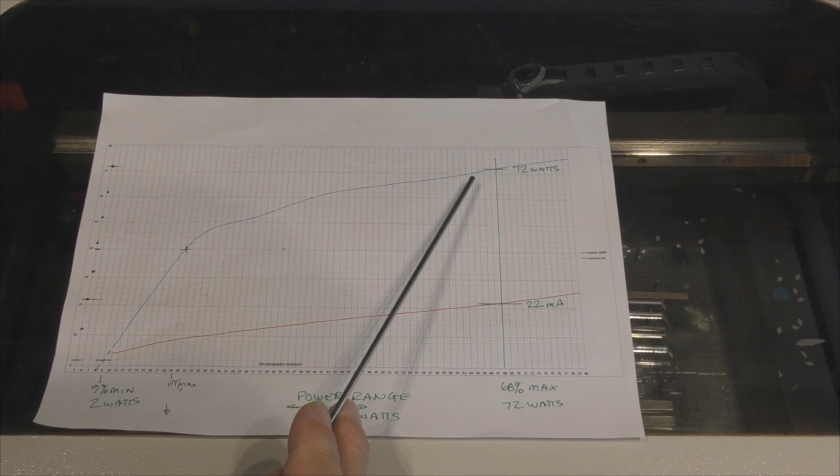Now, we found out last time that working over such a wide range caused quite a few problems when we're putting a lot of power in, specifically at the lower speed. So today I'm going to try some of the same tests again, but suppress the range over which I work.

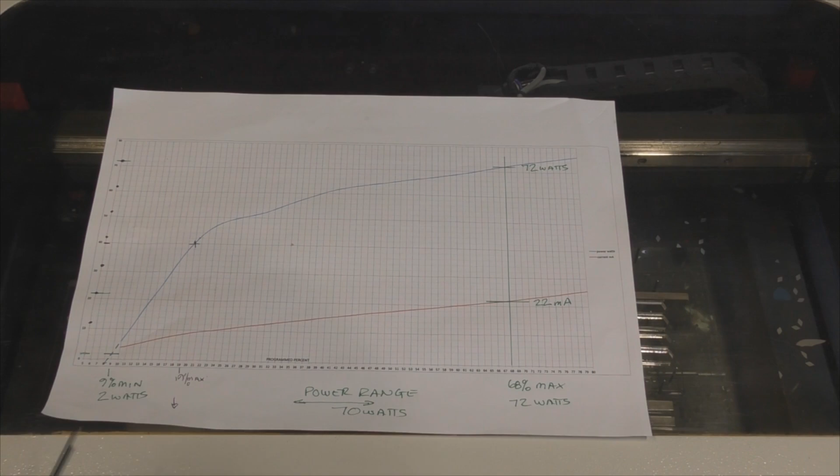Now that might sound like a good idea, except it means that when I'm calling for white, I'll still be punching a hole with 20, 22 watts. That doesn't make any sense at all. For white, I really need to be close to 0, which is right down at 9%, or 2 watts. Now, the problem with working down here is you get non-linearity because of a completely different phenomenon.

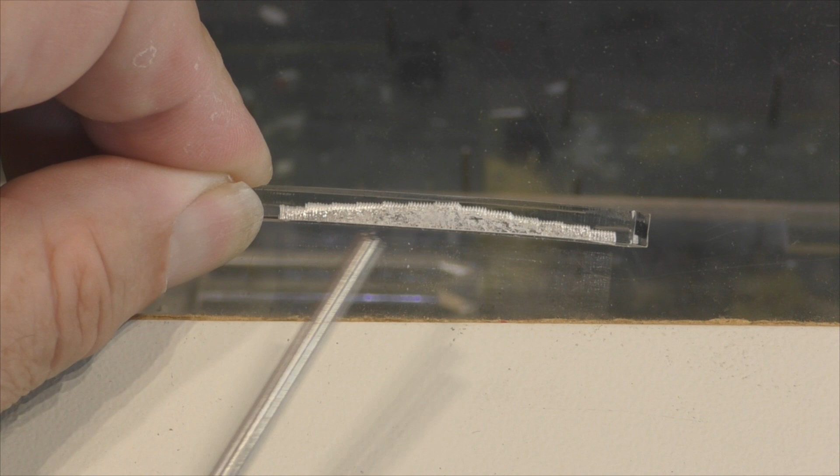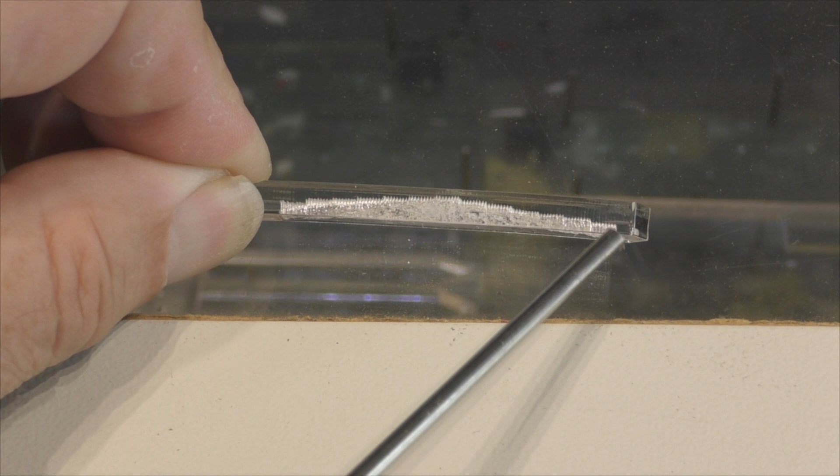That's because of this high frequency impact engraving zone, where although the average power claims to be, say, 10 watts for this step, because there are huge energy bursts, spikes of energy taking place, you're clearly getting substantially more than 10 watts worth of energy at these low steps. So that's more than 10, that's more than 20, and then we go on to 30, 40, 50, 60, 70, and then we drop down and at 20 we've got a big step down to 10 and a big step down to nothing. That's my problem - we're going to get some non-linearity at the lower powers purely because of this pre-ionization zone.

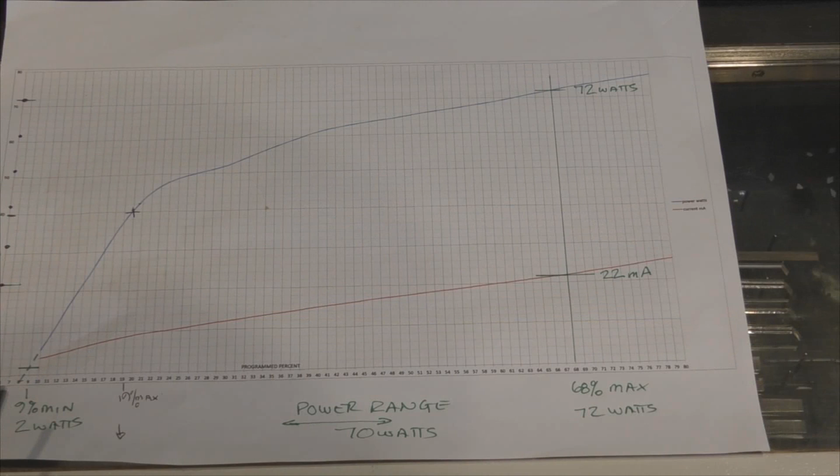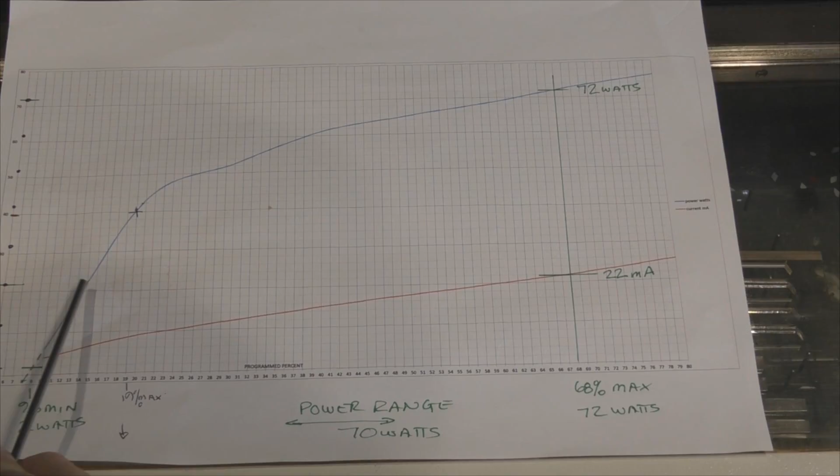I think we've decided we've got to stick with 9% because that's 2 watts. And how far do I go up the chart? Okay, so we've got our power set at 9 and 22 in the end. I'm going to set the speed at 50 to start with because that's the optimum speed - maybe we can go up to 100. We're not trying to bounce off the walls this time. All we're trying to do is establish some good parameters for this engraving.

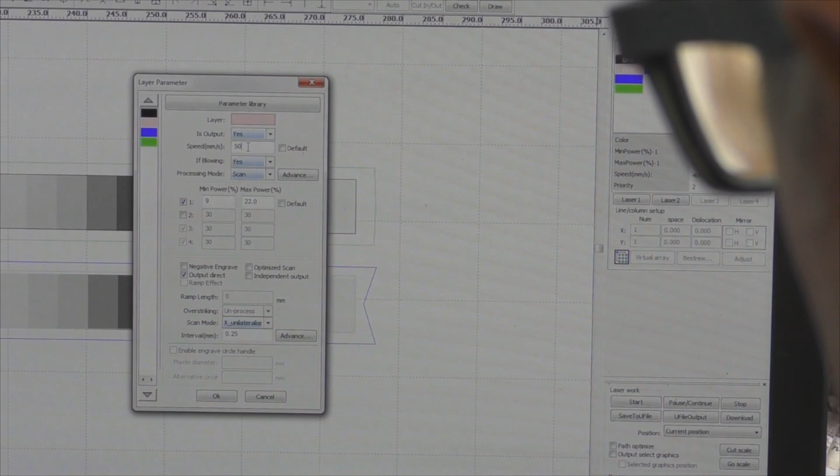I've still got my direct output and I'm still going to be using X unilateral, and the step interval at the moment I'm going to leave at 0.25, but I may change that later. We'll leave it at that for now, so we've got direct comparisons with what we did on the previous occasion.

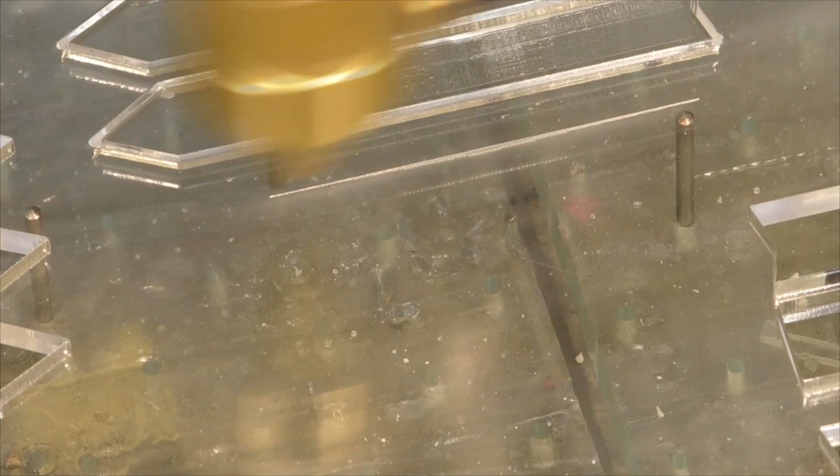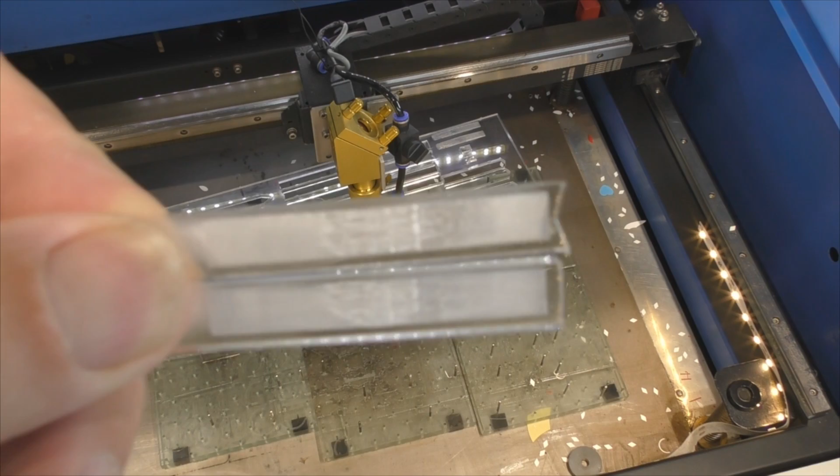Now, I don't think there's any doubt that you can hear that squeaky cut. I will just turn the fan off. Now that is a very noisy cut - that tells me we're working in this pre-ionization zone. We need to go and look at these under the microscope because we've got some nice cuts here and here, but just in the middle where maximum power is, it looks a little bit messy.

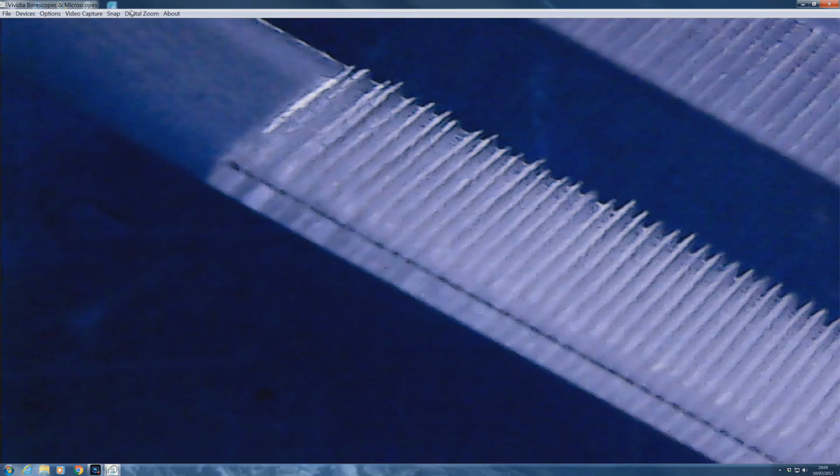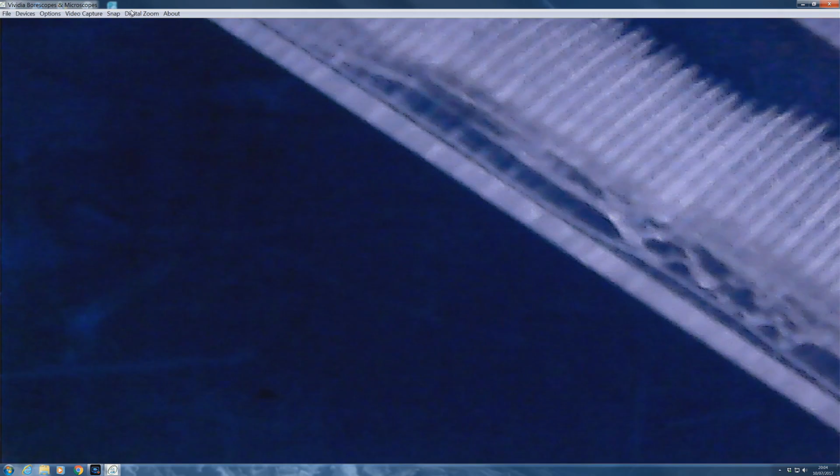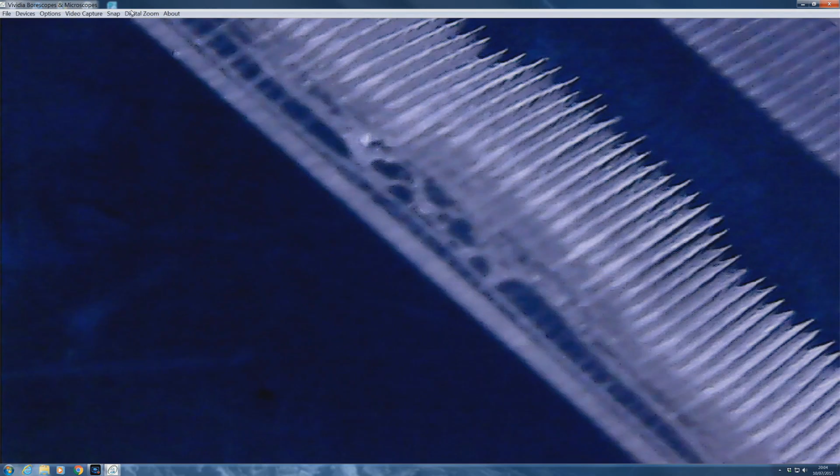Let's go and have a look, see what we've done. Well, this is 50 millimeters a second and 100 pixels per inch, and we've got a full set of pixels there by the look of it. Now, as we move towards the center, we can see some crazy paving appearing on the sidewall, indicating that we've actually put a little bit too much heat in there. Let's take a look at it from the other side, from the top side.

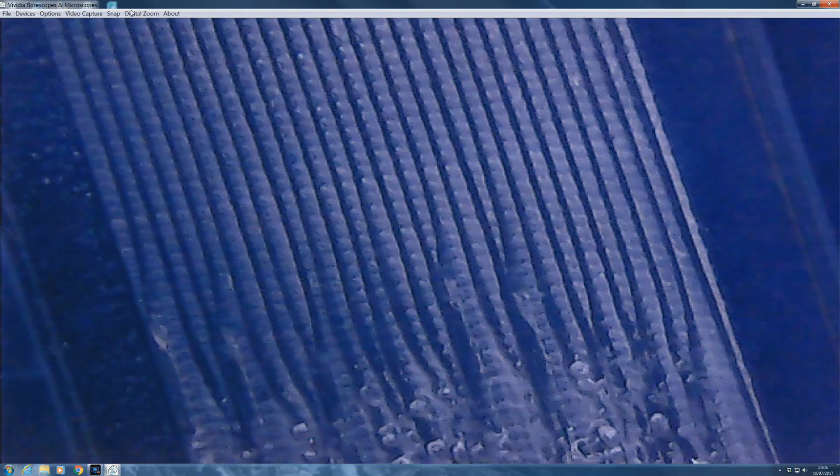There we've got a nice set of pixels, and as we run down towards the centre, nice parallel lines, and then all of a sudden when we get towards the centre, probably the last couple of steps, we're starting to break up, and we're getting a bit of a hideous mess here - that's purely because we've got too much heat into that particular area.

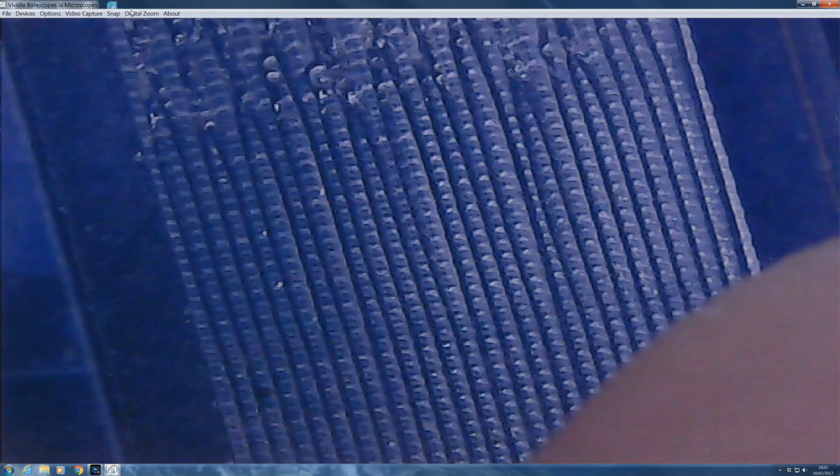And so consequently, here we go back out into the high frequency pre-ionization zone, and we're back to nice dots again. Now, I think the only thing we can do - we guessed wrong to start with at 22%. I think we're going to have to back this off to something like about 16%.

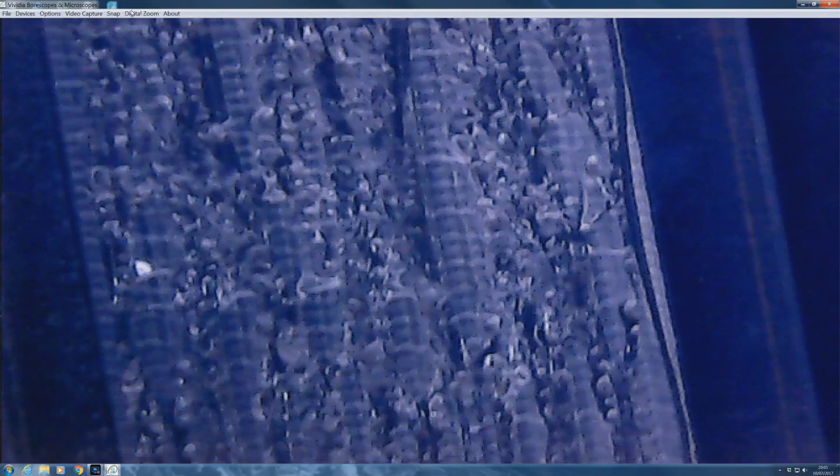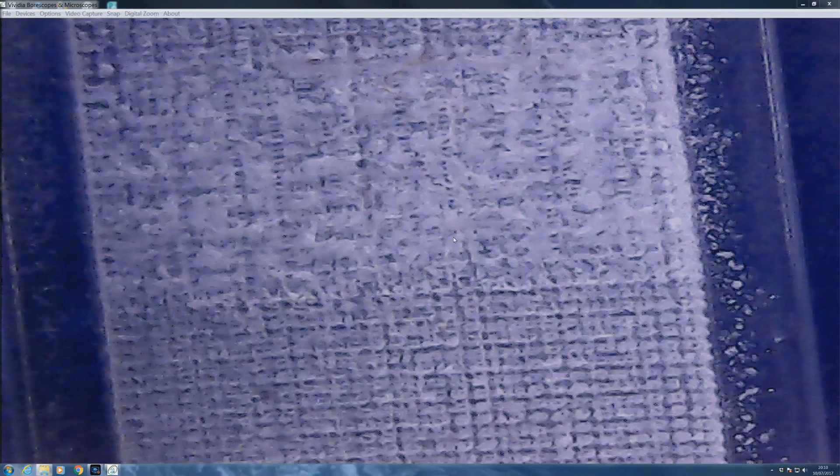There is still a hint of that strange marking in the centre, but I think what we're going to do at the moment is not go any lower. Here we are at 16%, and we've still got our little spiky gear teeth. Let's turn it over and have a look at what's happening towards the centre. There's just a teeny weeny bit of fuzziness right in the centre spot, but generally it's not bad, so I think we can live with 16%.

Now the focus is currently set to 4mm and it should be 5, so I've already set it just a little bit below the surface. But what I'll do is change that to something like 7mm. So that's 2mm out of normal focus, but right at the centre it's going to be closer to 3.5mm out of focus.

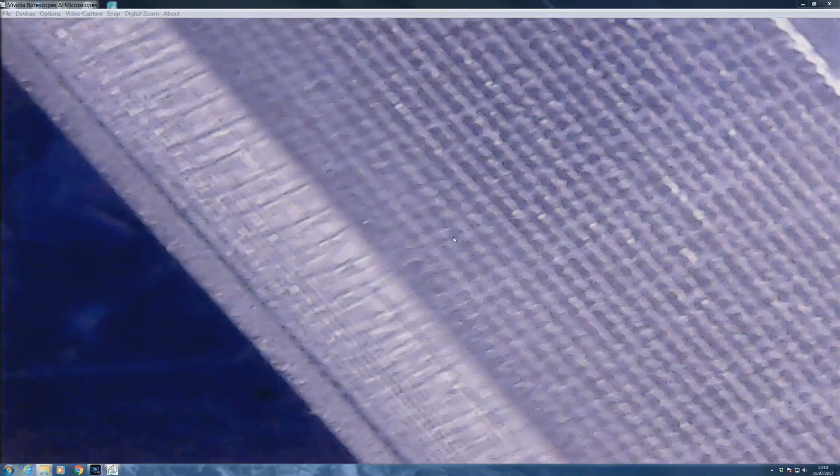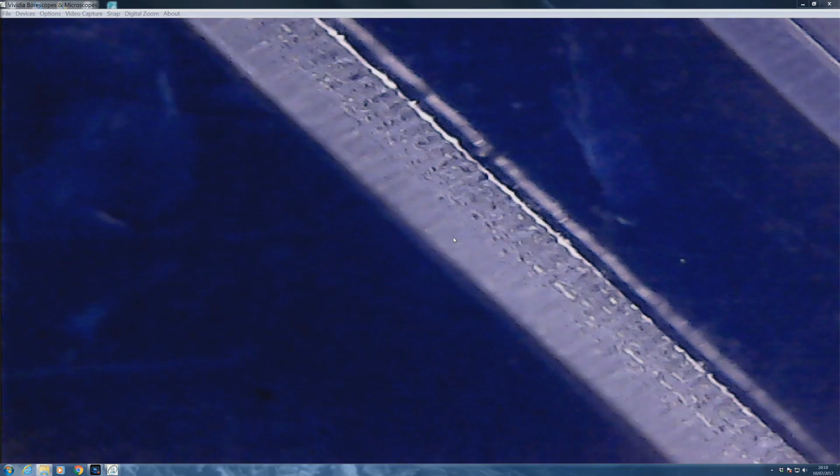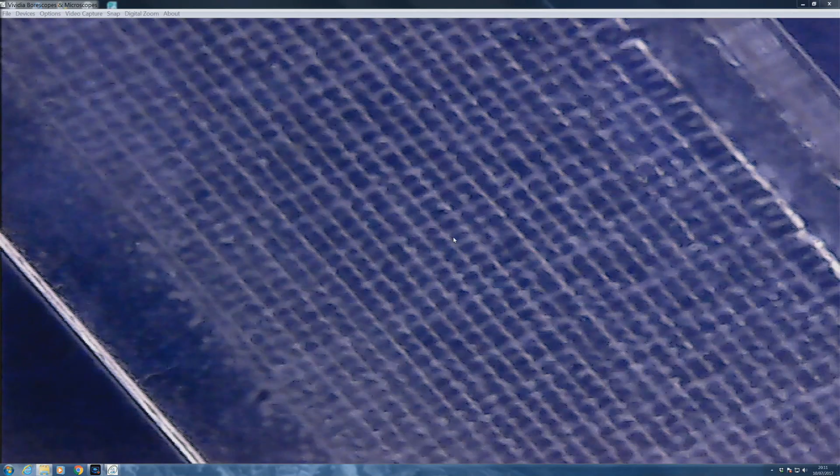Here's what 16% looks like when we defocus the beam. Let's have a look at it from the side. And look, there's absolutely no serious peaks there—little teeny weeny bobbles, but no peaks. So I only needed to drop the work by 2mm to get rid of those peaks. In other words, the out of focus has caused those peaks to disappear, and I've got a fairly uniform surface.

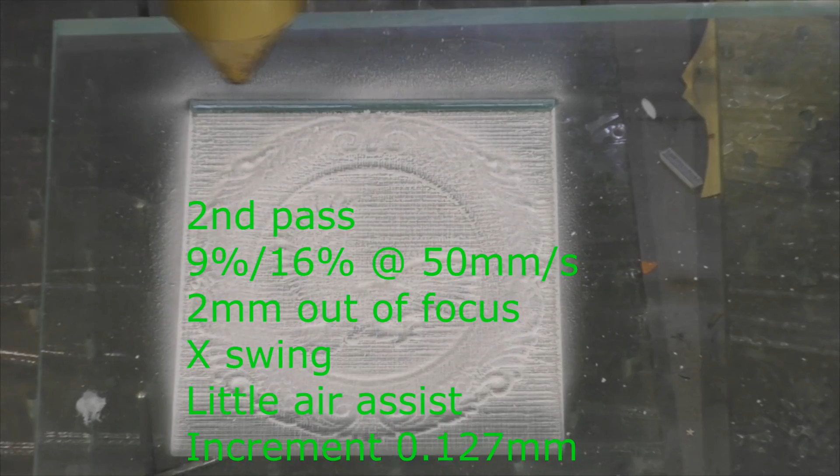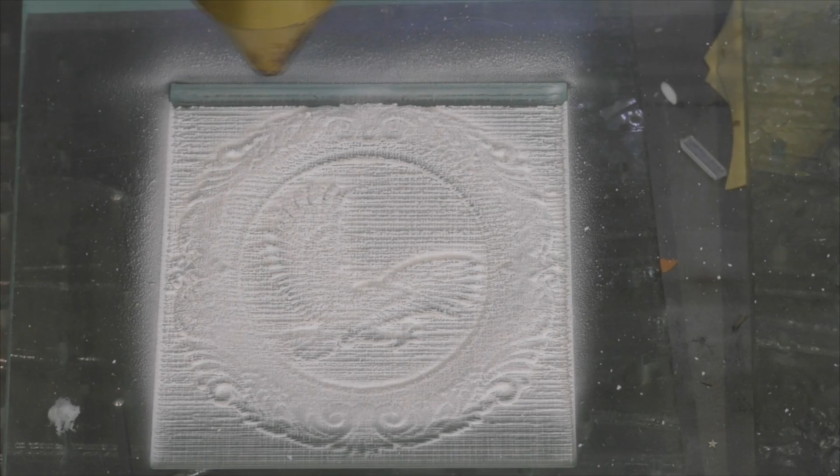Well, we've done one pass, and now we're just about to start the second pass. It's got a little bit of definition to it already from the first pass. Now I'm going to close the lid because I want the gas to lift up and flow across the job—I don't want it to settle on the job. Now that's not bad for just 2 passes.

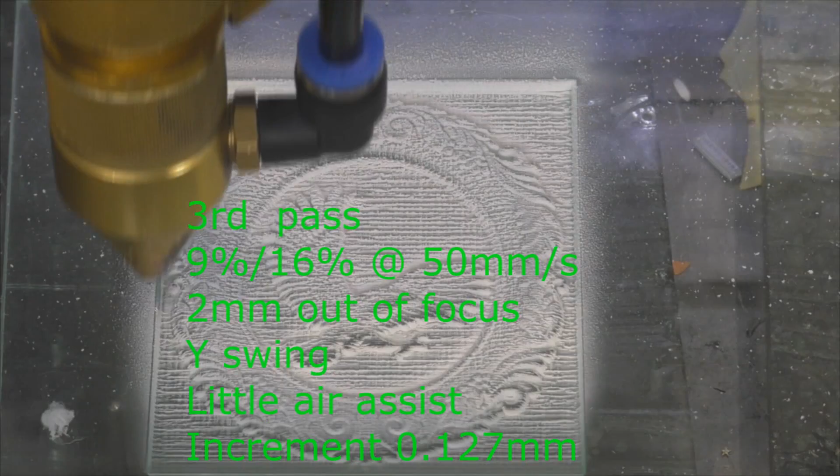But what I am going to do is try something completely different for the next pass. Well, it's 2 passes and about 3mm deep, so that's not doing too badly. I have to say that I'm pretty pleased at the amount of detail that's coming out. I didn't have anywhere near this success the last time I tried this.

So I'm doing this with roughly 30 watts coming out of the tube. By the time you take away, let's say 5% for each mirror—1, 2, 3—and the lens, that's 5, 4, so 20%. I'm losing, what, 6 watts? So we've only got 24 watts maximum, down to about 1 watt. So between 1 and 24 watts is carving that job.

Okay, now I'm going to change a couple of things. I'm going to change it back to X unilateral. I'll leave the power the same, and I'm going to put the speed up to 200. Hopefully that's going to produce like a polishing cut.

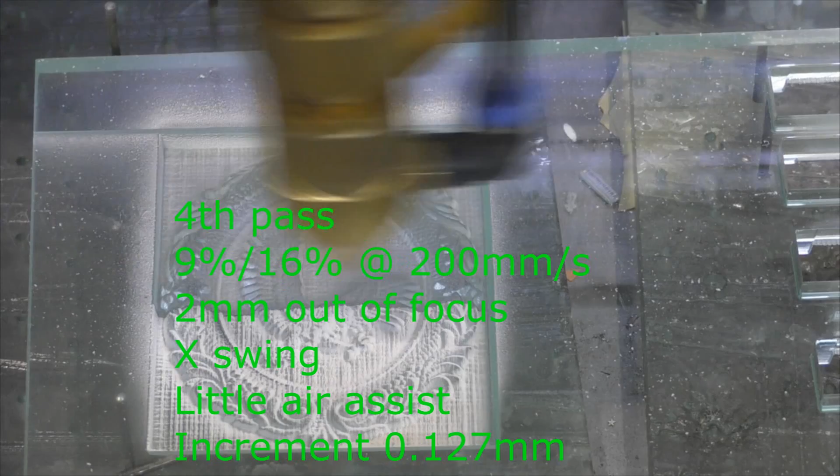Well, that seems to be doing a pretty good job of polishing that up. It's leaving it nice and clean. The background is still a bit dusty, but the actual image itself is coming out beautifully clean. It's amazing what a little bit of understanding can do, isn't it?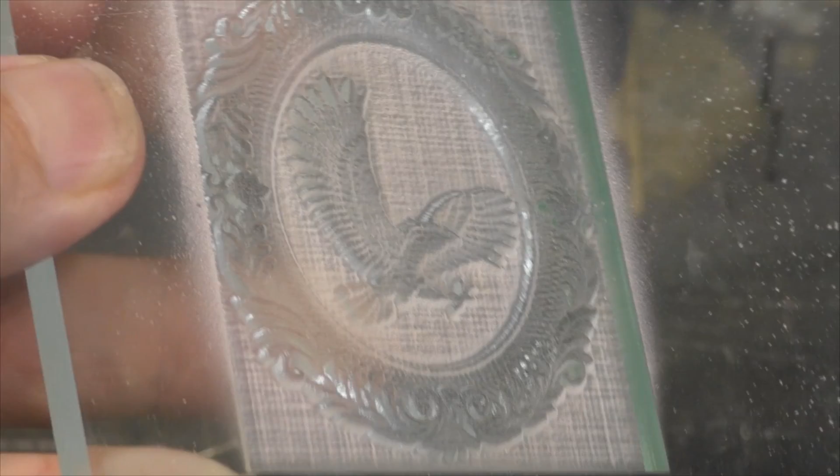Now we've got our tapestry background as we had before, but hey, we know what's causing it now, so we won't worry about it because we can fix it. But the rest of the detail there—it's pretty good, isn't it? In fact, as you can see there, that is literally only dust sitting in there.

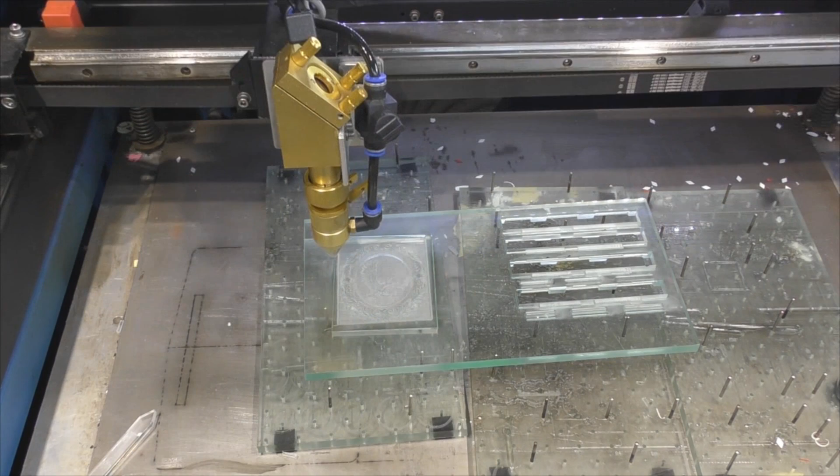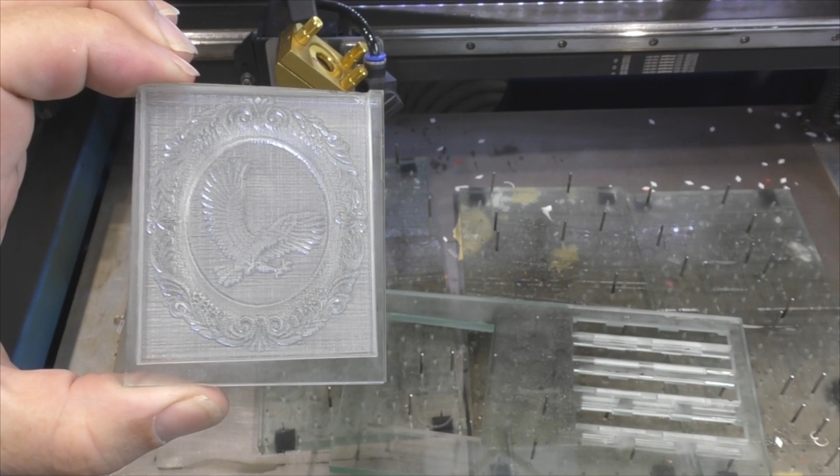Well, that's amazingly clean, isn't it? Catch a little glimpse of the light behind it, and it really does come out beautifully. Now I have to say, I'm quite proud of that.

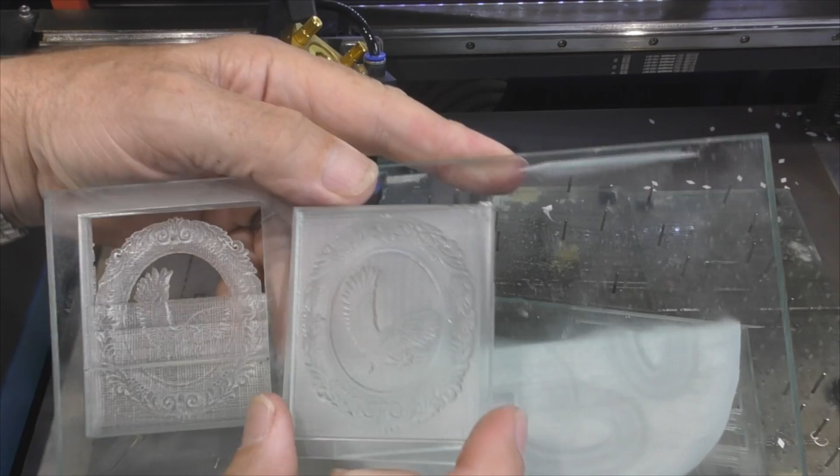Now I dug up my experiment from a year ago, and there is no comparison.

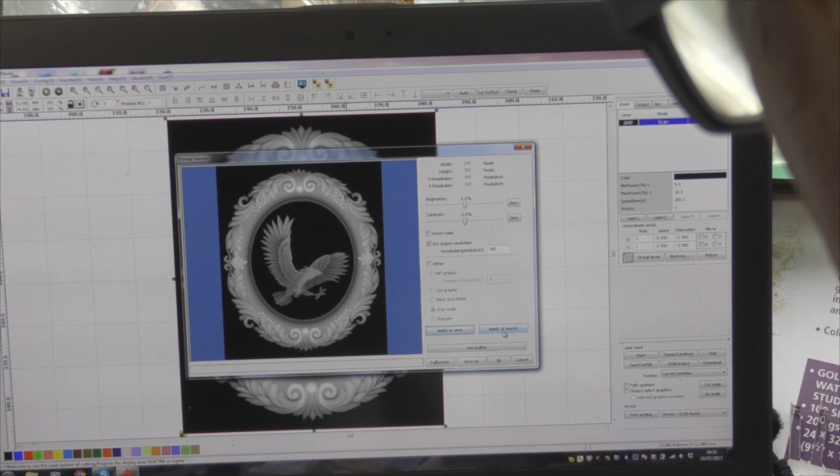Now this picture, if we put the bitmap handle around it, we find that it comes in at 343 pixels. Make those go 0. Set output resolution, we'll change that to 100. Apply and apply. Okay.

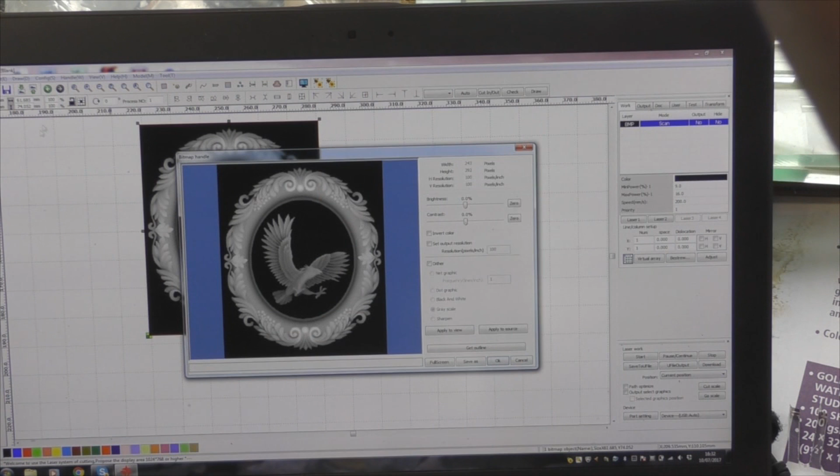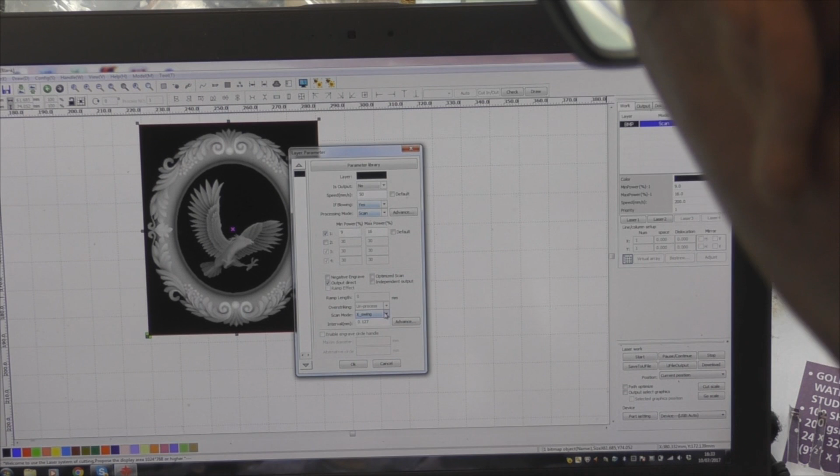So we'll just check again—bitmap handle. And sure enough, it's now 100 pixels per inch. Okay, and I'm going to start down at the bottom left-hand corner. We're going to use the same parameters, 9 and 16, 50 millimeters a second, and we're going to go for X swing and 0.127, i.e. twice as many scan lines as the resolution. So the scan lines are 200 scans per inch. Okay.

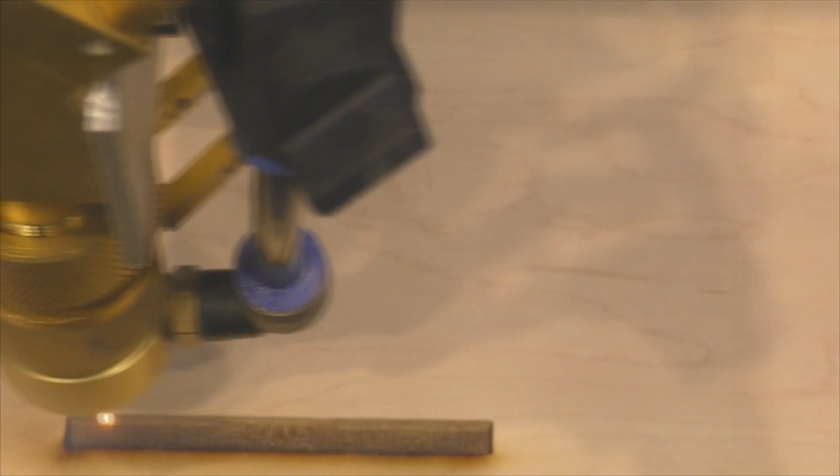Looks like the power is performing about the same as it did on acrylic. In other words, it looks as though we've taken about 2 millimeters deep. So again, it looks as though we should be doing 4 cuts.

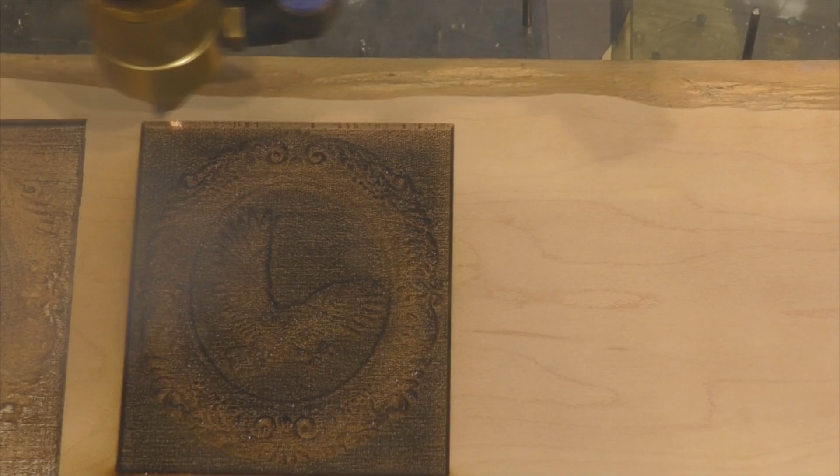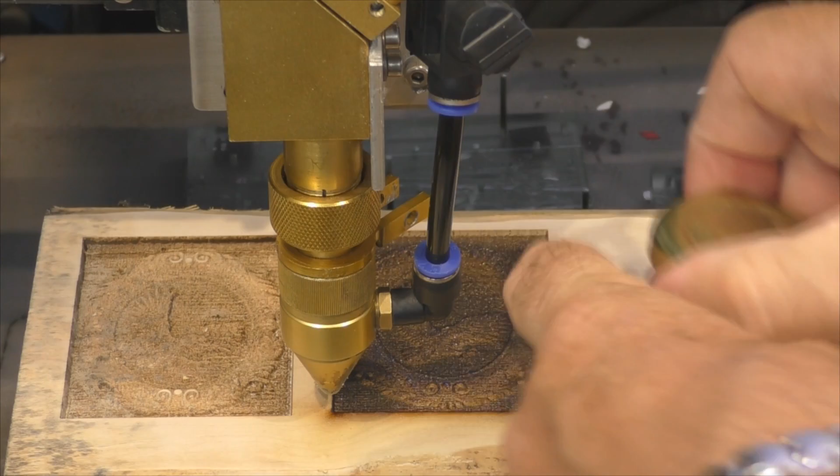2 horizontal cuts, a Y swing cut, and then maybe a 200 finishing cut. Now it looks like a nasty, shiny, tarry residue on the surface there, and I'm wondering whether I've still got too much air assist. So when this cut is finished, I'm going to adjust the air assist. Don't want to touch anything, so I've got my little container of water there.

As you can see, I've still got quite a lot of bubbles coming out of there. So let's just turn that down to reduce the bubbles. In fact, I've got it turned right off now and it's still bubbling nicely. So that's good, I can turn that off and know that I've still got some airflow coming out of the nozzle.

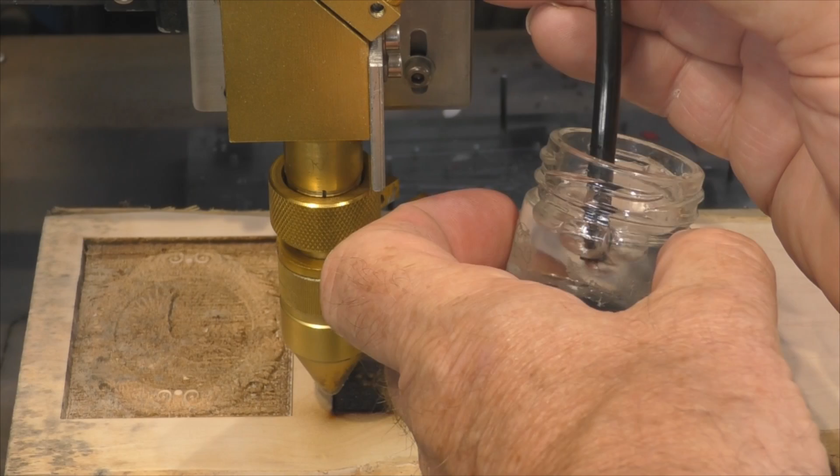No, we won't. We'll have some air. We'll have lots of air.

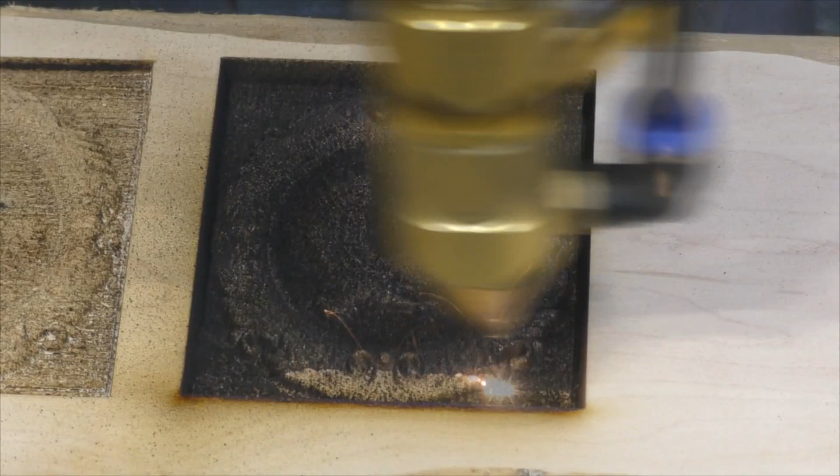Well, it's well formed, but also well black. So let's just see what happens when we go for a 200 clean-up cut, 200 millimeters a second. Wow, that's interesting, look at that. Not only does it work on acrylic, it also works on wood.

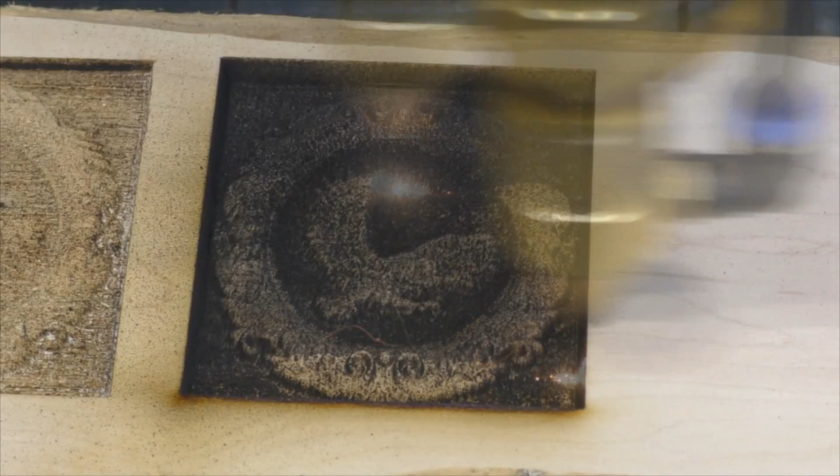Now, as you can probably see, that looks rather speckled and pitted. So I suspect that some of those very sharp, pointy power pulses have gone in and burnt their way into the wood. Now, whether if I do another one of these cuts it will tidy it up, I don't know, but we might give it a try.

That doesn't fix it. Let's go and scrub it with a scrubbing brush.

Well, here we are. We've scrubbed both of them up with some soap and water, and we've taken most of the brown off of the one on the right. The one on the left had all sorts of strange lines in it, and some of those lines were vertical lines that I described as coarse hessian.

Well, we don't have those same things in here. The technique that we've used now of X and Y, I think, has destroyed that pattern, and what we've got instead are some dots in the background. So overall, I think this is quite a pleasing result.

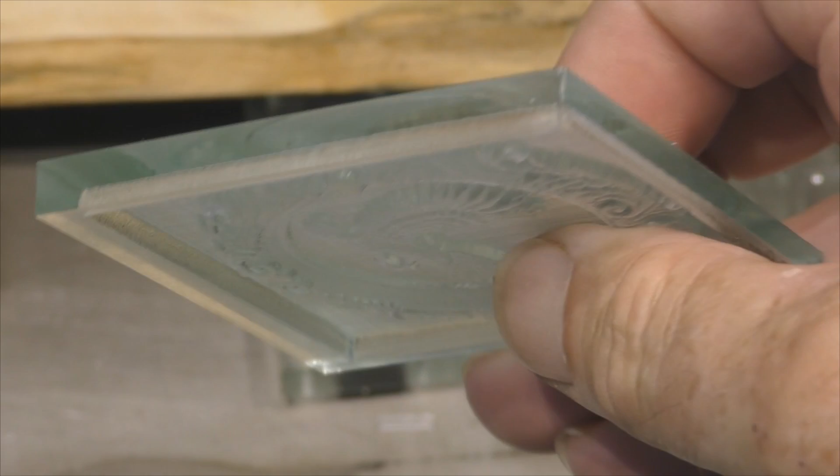The Perspex one is absolutely brilliant. Now that Perspex is not normal clear Perspex. If you look on the edge, it's got a greeny look to it, and that's supposed to simulate proper glass. And it has got a sort of a matte finish on it, like a piece of Lalique glass. And overall, I'm extremely pleased with that piece.

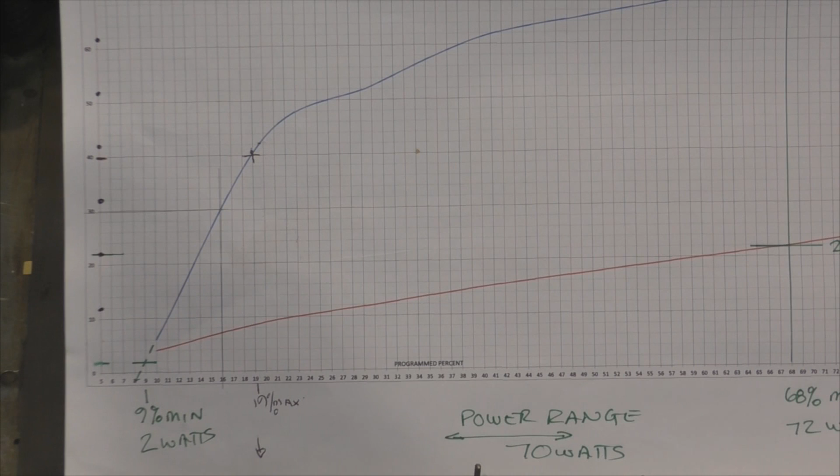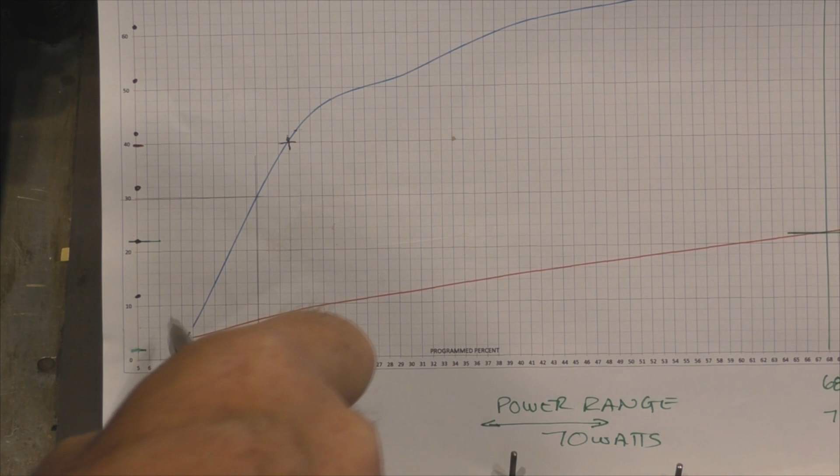Well, as I indicated at the beginning of this session, I didn't think we would need to move up into this non-linear part of the curve. And in fact, we've been working between 9%, which is 2 watts, and 16%, which is 30 watts.

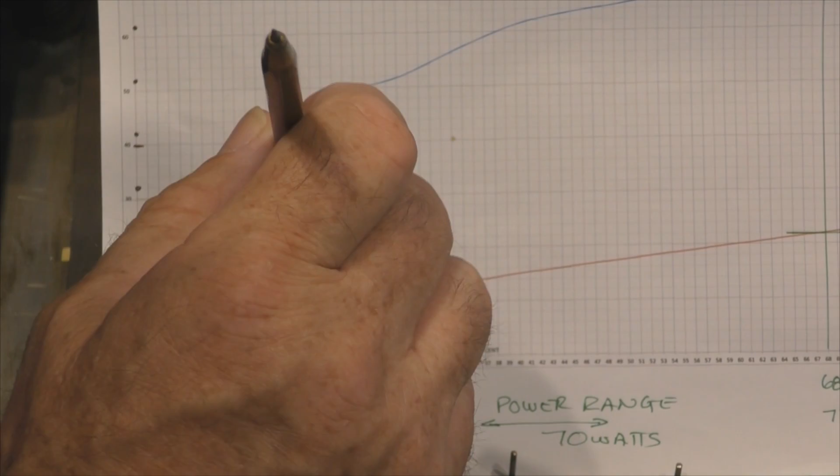Now, I think that we could probably even move down here to somewhere in the region of about 12% or 13%. 13% would be good, because that's about 18 watts. So between 2 and 18 watts would probably give us even better results, because we wouldn't get quite such an extreme burn.

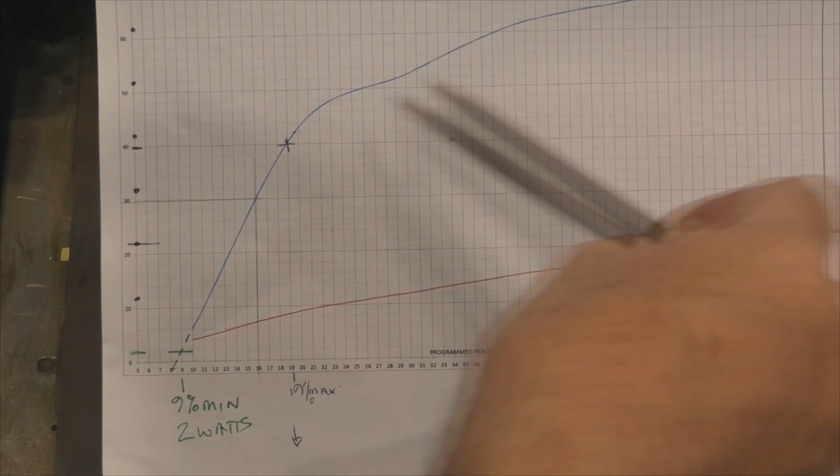But basically what I'm saying is, with any sort of engraving, it looks as though we need to be working down here in these very, very low regions, not up here in these 60-70 watts region, because that's for cutting. Engraving appears to be most successful down in this 20, 30, 10 even watts region.

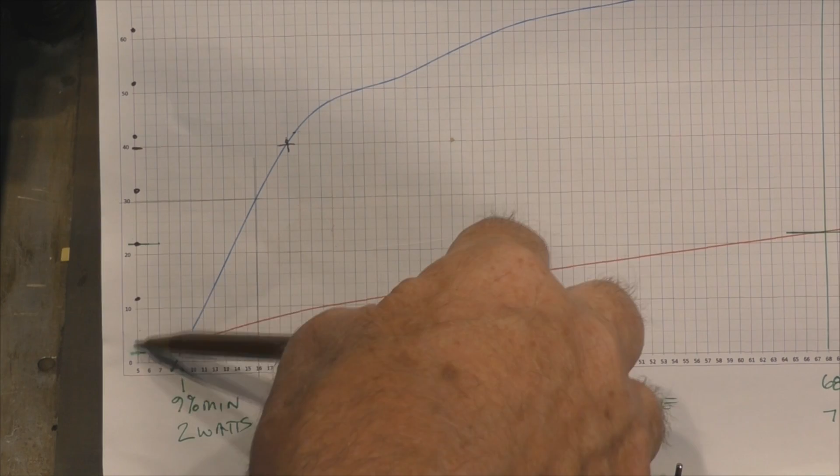Well, I think that's been quite a successful conclusion to our 3D engraving. There's obviously a lot more to learn, there's a lot more experimenting to do, but I think from the information that we've now found, we can proceed and experiment on our own, you and me.